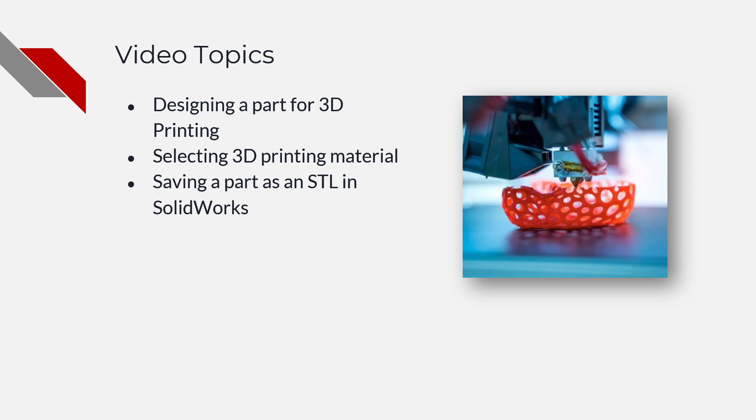In this section, we will cover how to design a part for 3D printing. Now, to get the best results from a 3D printer, parts need to be designed with the 3D printing process in mind. As a note, this video is only referencing FDM 3D printing, which is the process that works by melting plastic with a nozzle and laying down thin layers of molten plastic on top of each other to build up a part, which can be seen in this image.

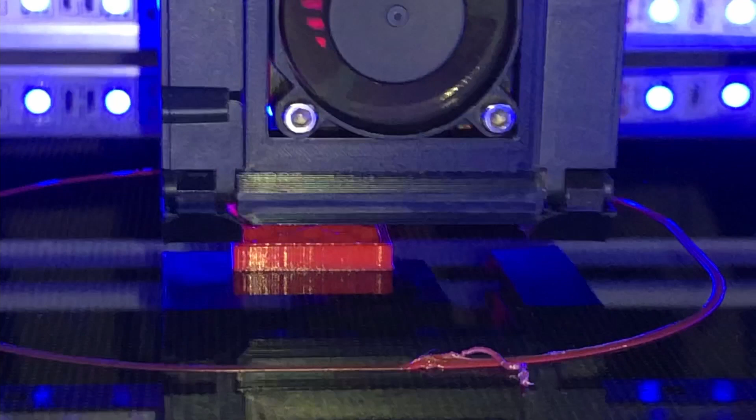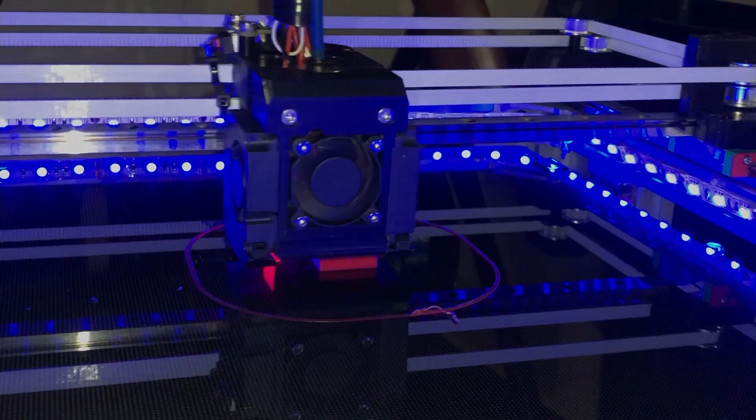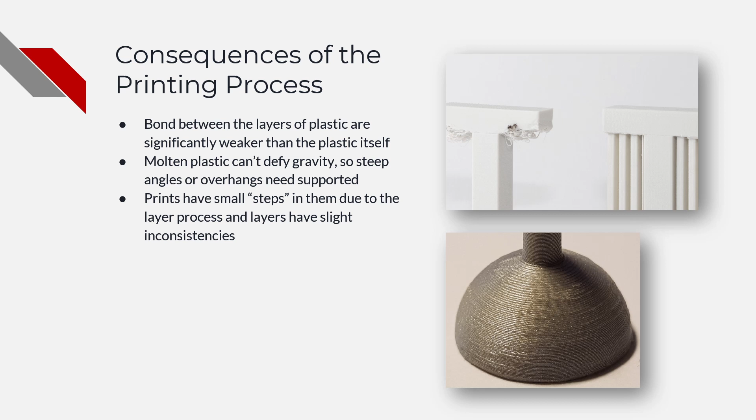Lastly, these printers are fairly accurate but still have some inconsistencies. And parts will have small staircases on them because of the layers, as can be seen in the image on the right. I mentioned how the bonds between the layers are significantly weaker than the plastic itself, so let's learn how we can design our parts to avoid this issue.

The orientation a part is printed in determines what direction the layers go, so you can use this to make the layers go in a direction so the forces would not be trying to pull apart or shear the layers. This image shows a good example. In the first case, the force that is acting on the part is trying to shear the layers apart, so it will likely break without much effort. The second part is oriented so the layers will not be pulled apart or sheared by the force, so it will require a much greater force before the part fails.

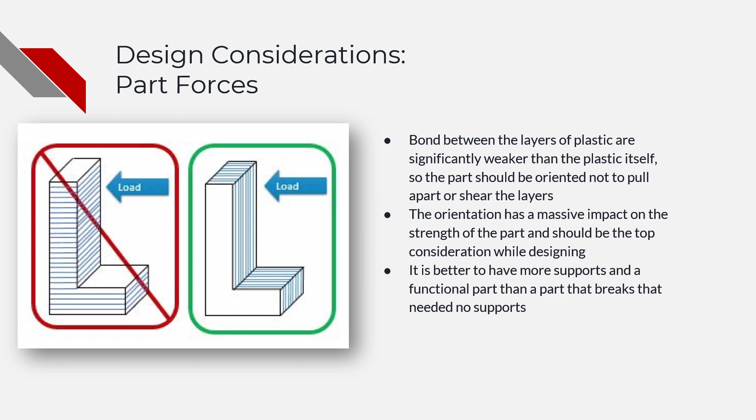I will soon be covering how the orientation of a part can also be used to reduce the amount of support material needed, but it is very important to note that the orientation of a part should be made to withstand the forces first as the top priority. It is better to have a part that works and was printed with supports than a part that had no supports and breaks. This image here shows some good examples where 3D prints are weak and strong with various forces. You should use this as a reference when designing parts.

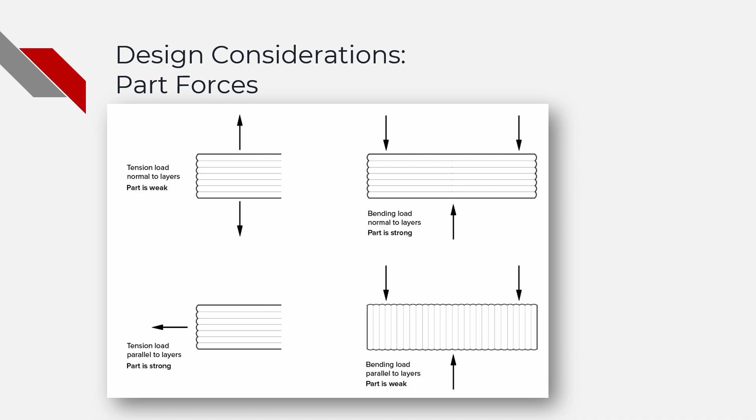When forces are pulling the layers apart, the part is weak. When forces are compressing the layers, the part is strong. When the forces are pulling along the layers, the part is also strong. But when the forces are shearing the layers, the part is weak. So make sure you understand what forces your part will experience and the orientation that will be the strongest for those forces when designing. Next, we will cover supports.

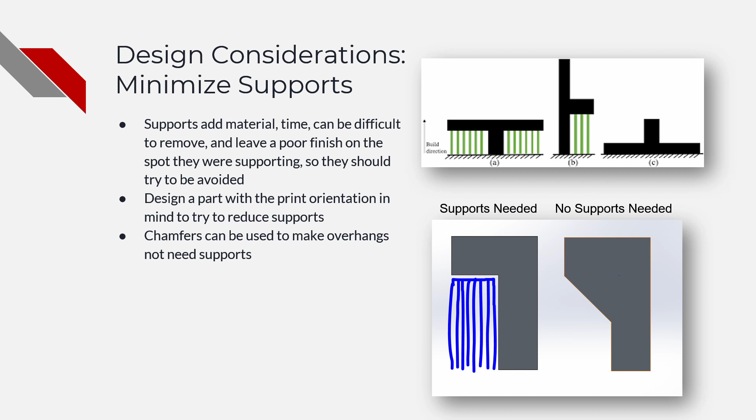The last design consideration that I'll be covering is adding clearances to your part in the spots where it interacts with other parts. I mentioned how 3D printers aren't perfect, and this would be why if you have a 1-inch hole and a 1-inch diameter rod, they wouldn't fit together.

To make them fit, a small gap would need to be modeled in to account for the imprecision printers have. This step may not seem like a big deal, but it can save you hours of sanding a part down to size if done correctly.

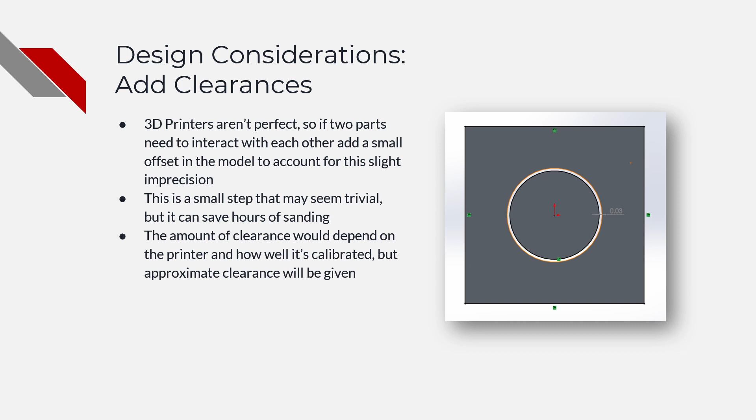It is important to note that the amount of clearances needed varies between printers, but I'll give you a starting point. So let's say you want two parts to press into each other and you want it to be very difficult to remove the parts afterwards. You should add an offset of around 0.1 millimeters to all surfaces that interact. And I wouldn't recommend going lower than 0.05 millimeters if you want it to be tighter.

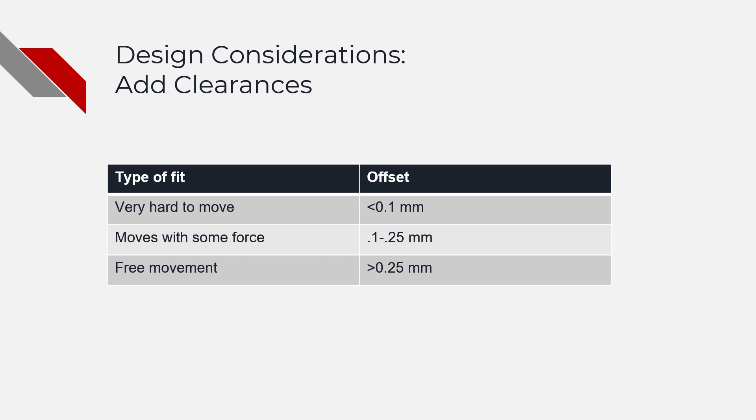However, if you want a part to press into another part and stay in place, but you can still move it around with some force, I'd recommend an offset between 0.1 to 0.25 millimeters. And let's say you want two parts to slide past each other with minimal friction, you should add an offset at or above 0.25 millimeters. Use this chart as a starting point and iterate from there.

If you have a really big part or having to reprint it to adjust clearances would be timely or costly, consider making a small test print like the one shown here. It has a shaft with holes that have different offsets that can be used to test clearances on a small print before applying those clearances on a larger print.

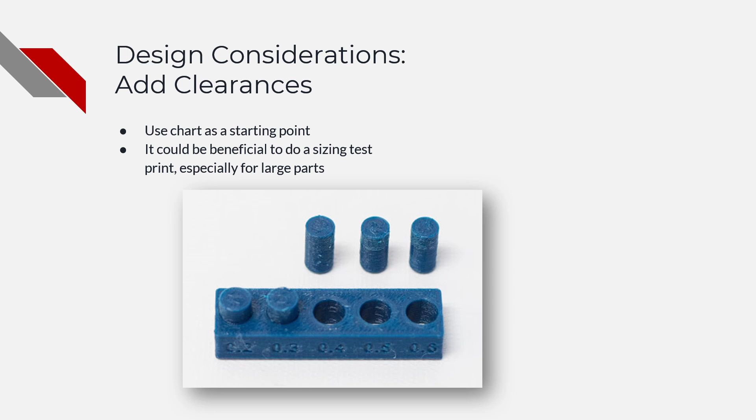Congrats! Now you know the basics of designing a part for 3D printing. If you're confused, have questions, or need help, don't be afraid to ask me or any one of the team members. We'd be happy to help.

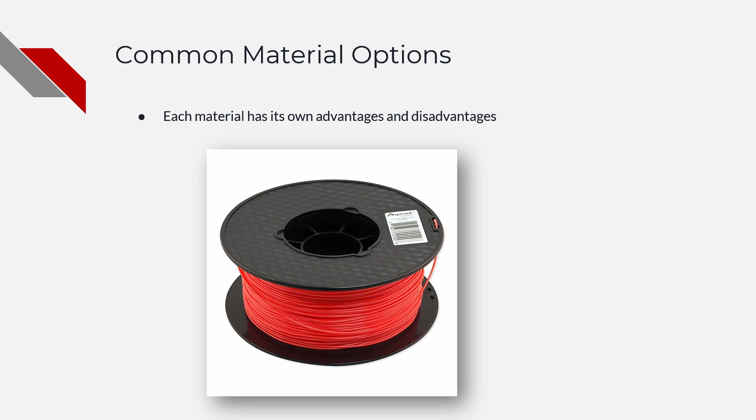Now in this next section, we will cover how to choose the correct material for your 3D print. 3D printing material comes as a round plastic filament on a spool that looks like this. There are different types of plastic filaments that can be made, and each has its own benefits and drawbacks based on the type of plastic. This chart here covers the materials that will be suitable for most applications.

The first is PLA. This is the most common 3D printing material, and for good reason. It prints easily and has excellent strength and rigidity. It is a great choice for over 90% of applications, I'd say. However, it has two notable drawbacks. First, due to its rigidity, it is not great at absorbing sudden impacts, which would cause it to shatter. So if a part would take repeated impacts like drone landing legs, it wouldn't be the best material.

Its other drawback is it will start to get soft and deform under mildly low temperatures. So if you want a part to mount hot electronics or sit inside a car in the middle of a summer, it wouldn't hold up well. The next two materials are PETG and ABS. For reference, PETG is the plastic soda bottles are made out of, and ABS is the plastic Legos are made out of. They are fairly similar materials and can cover some drawbacks of PLA.

Both are slightly more flexible, which means they can take more of an impact than PLA but sacrifice some strength. They also deform at a higher temperature than PLA, with ABS's being the highest. However, ABS can be quite difficult to print, so I'd advise choosing PETG for a better print result in most circumstances instead of ABS.

The last material I will cover is TPU. It is a flexible, rubber-like material that could be useful for something that needs to be grippy or something that needs to be able to bend. There are other fancier materials out there, but this table should help you decide the best material for your application.

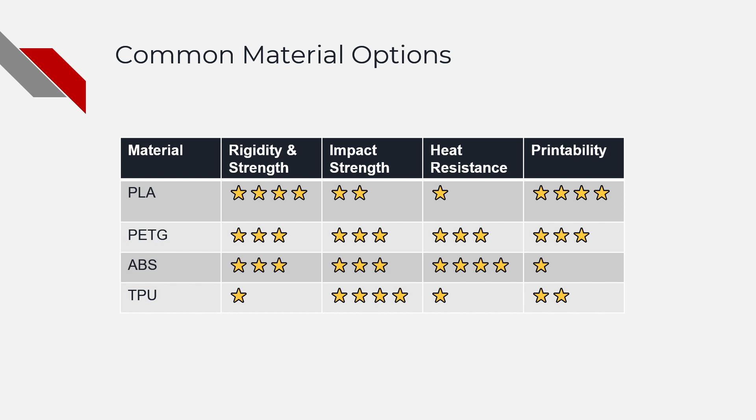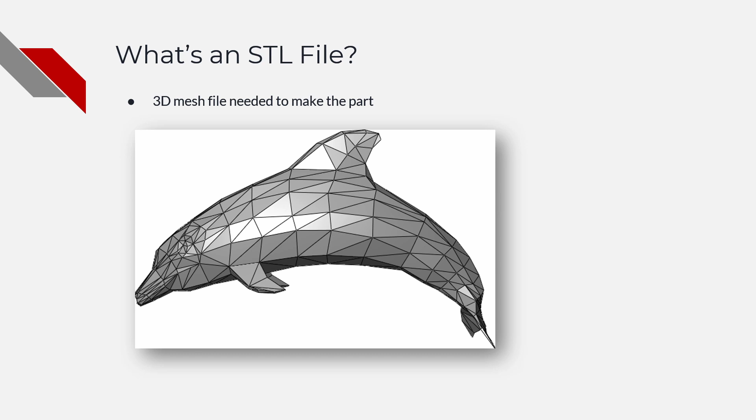For the final section, I'll walk you through how to convert your SOLIDWORKS part file into an STL file. First, what the heck is an STL in the first place? Well, it is simply a file that represents a 3D model with a bunch of triangles. You can see this dolphin here has been subdivided into triangles to approximate the shape of the animal. This file is important because it's needed to print your part.

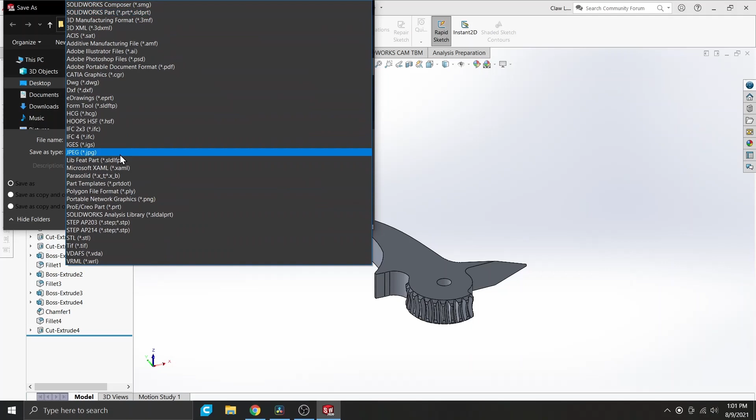Open up your desired SOLIDWORKS file and go to File, Save As, and give it a descriptive file name. On the Save As Type dropdown, select STL near the bottom. Then hit the Options button. This screen is where the settings of the STL can be set.

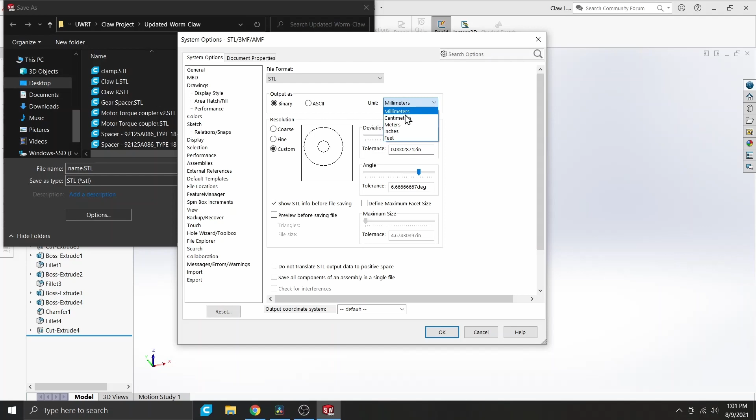Click Custom under Resolution and slide the deviation and angle sliders about 3/4 of the way to the right. This is how you adjust how fine the triangles are for the model. Ensure the units are set to millimeters in the top right. Click OK and click Save.

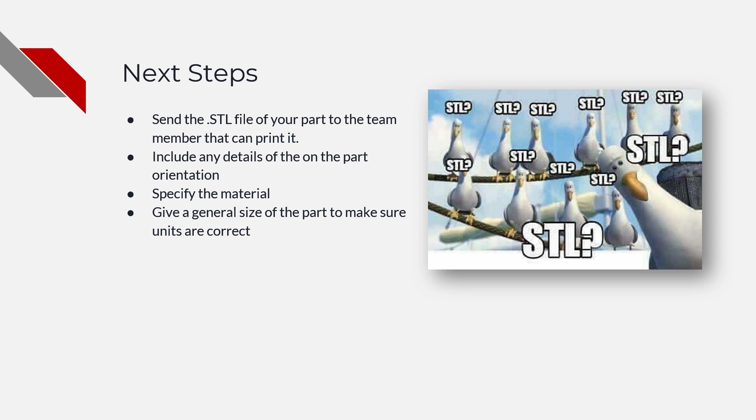Now that you have your STL file, send it to the person that will be printing your part, along with any notes about the material, print orientation, and functionality of the part.

Congrats, you learned how to design a part for 3D printing, select the right material, and how to save a part as an STL. If you have questions or need help with any of the aspects of 3D printing, I'd be happy to help. Thanks.